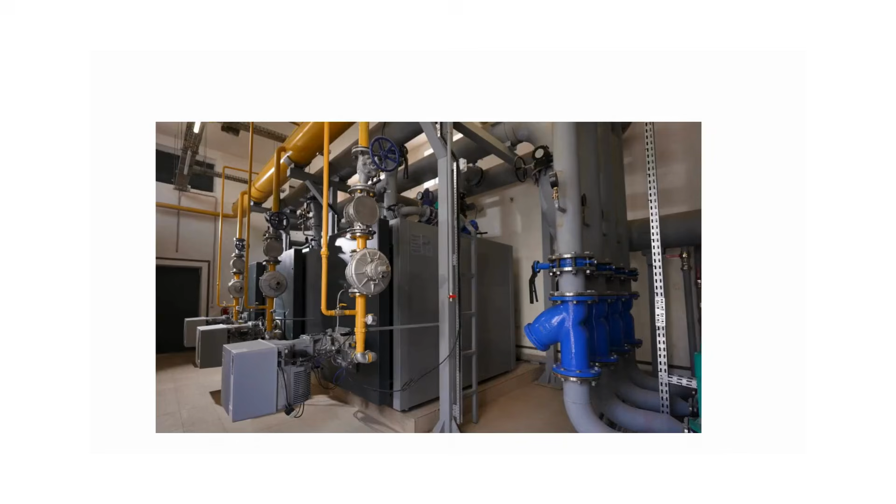A good boiler technician can walk into a boiler room and spot trouble before ever touching a tool. But how quickly can you do it? I'll bet you can find the problem in less than 5 seconds. Today I'm going to show you 3 boiler room photos. You'll have 5 seconds to spot the red flag in each one.

Some of these mistakes cause nuisance problems. Others can lead to poor heating, water hammer, and failed controls. So put on your detective hat and let's see how you do.

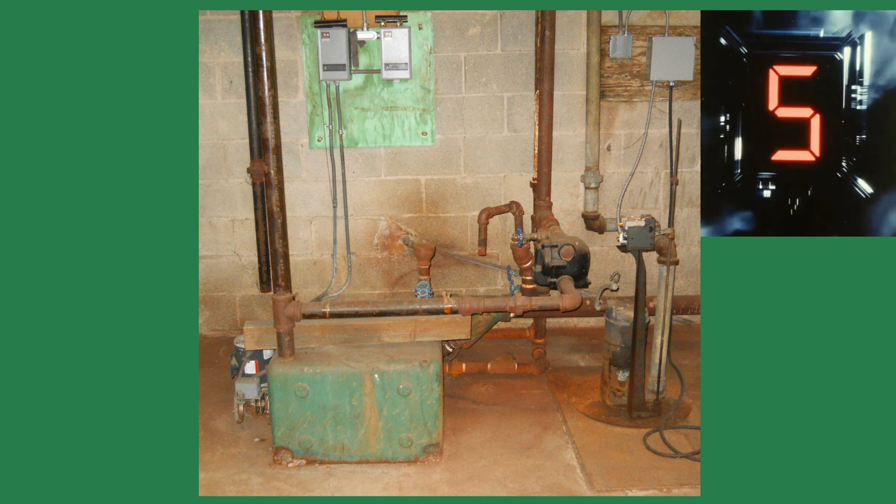Take a look at this picture. What red flag do you see? Did you spot it? There's a steam trap installed on the main condensate return line just before the tank. This is commonly called a master trap. Whenever I see one of these, I want to run as fast as I can from that building.

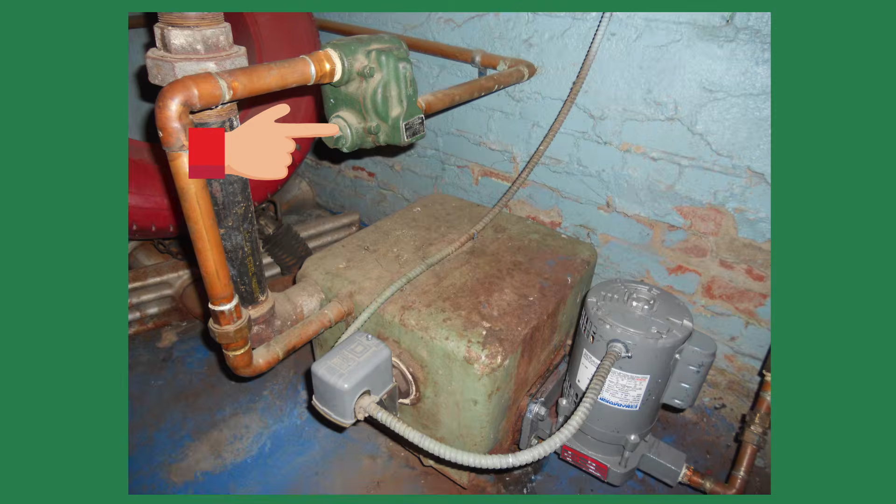Why? Because a master trap usually tells me there are other problems in the steam system, and those problems become your problems the minute you touch anything. The master trap is almost never the original problem. It was usually installed as a band-aid for another problem.

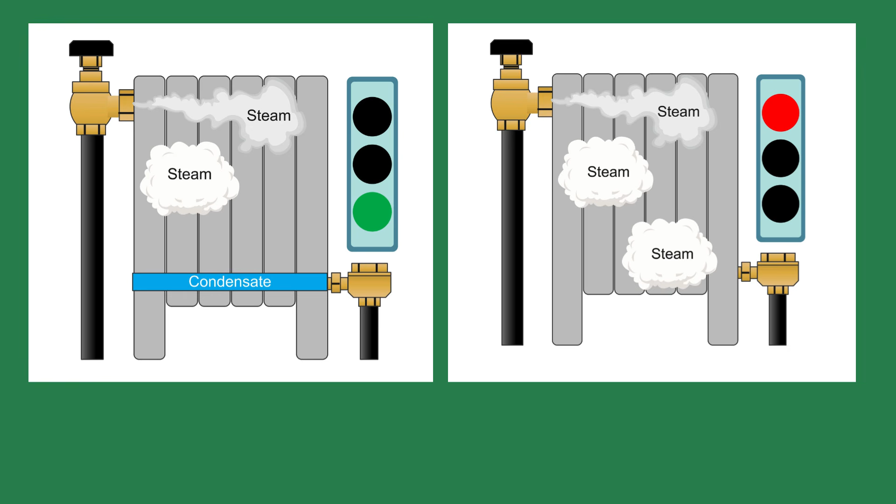In a 2-pipe steam system, the radiator and system traps are supposed to keep the steam out of the return piping while allowing air and condensate to pass. But steam traps eventually fail. If several traps fail open, steam can enter the return system and show up at the condensate receiver.

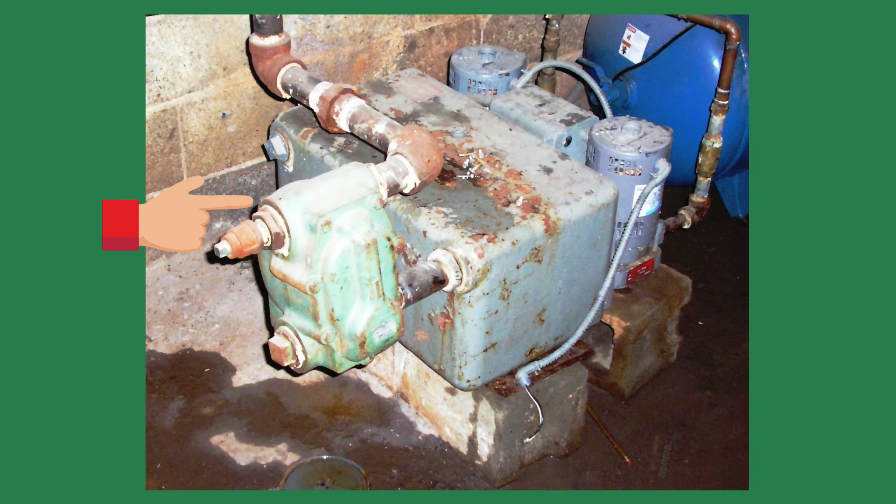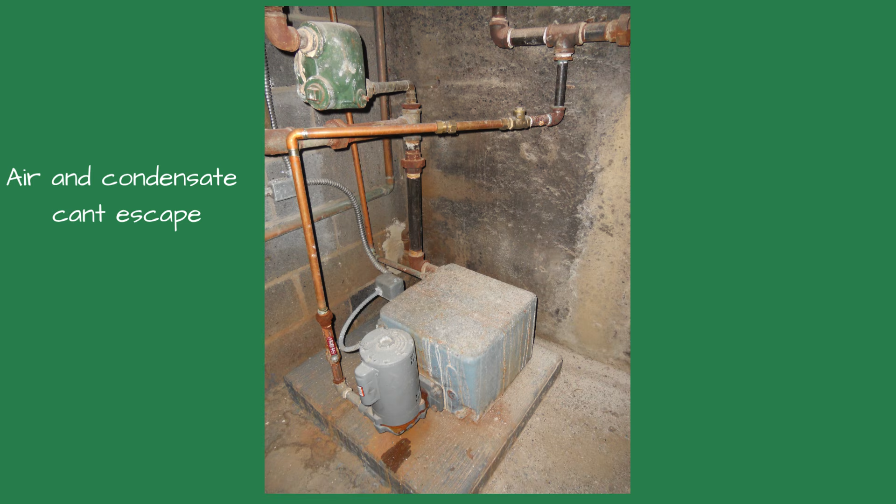Someone sees steam coming from the receiver and thinks, I know how to fix this. I'll install one big steam trap before the receiver. Problem solved, right? Nope. Now the system is double trapped. Air and condensate have trouble getting out of the system. You may even see slow or uneven heating, condensate backing up into the returns, water hammer, and higher fuel costs.

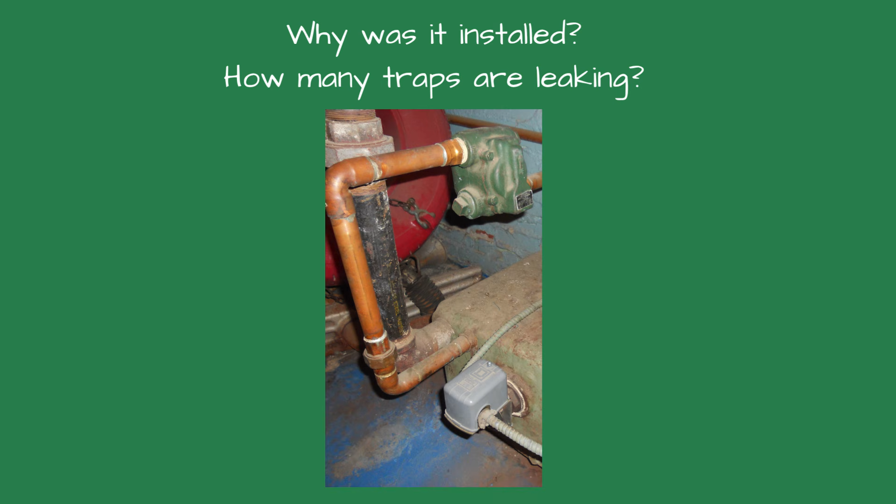The master trap hides the real problem instead of fixing it. When I see one, I ask 2 questions. Why was it installed? And how many traps are leaking into the returns?

I learned this lesson the hard way. I was working in an apartment building that had a master trap, and I removed it. What the owner neglected to tell me was that someone had removed all the radiator traps because they were leaking. When I removed the master trap, steam poured out of the receiver vent and overflow piping. That was a crazy day.

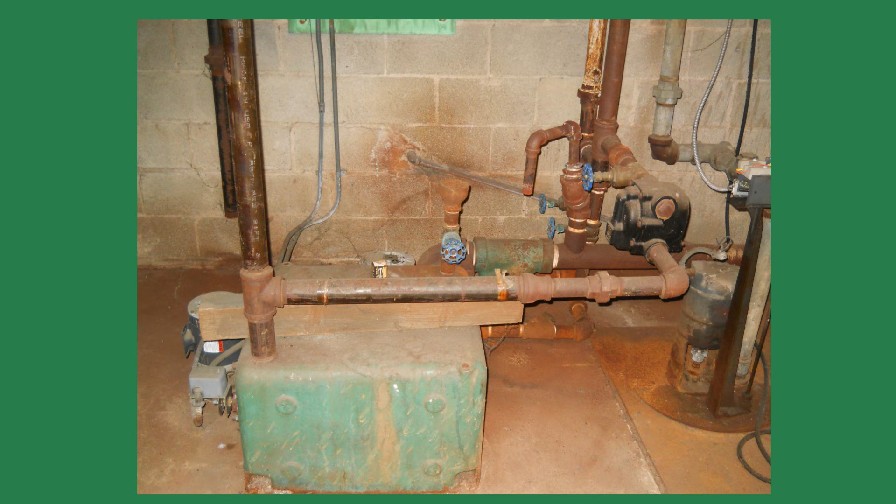The lesson? Don't just remove the master trap and walk away. Test the individual traps, repair the failed ones, and find out why the master trap was installed in the first place. Or just run away.

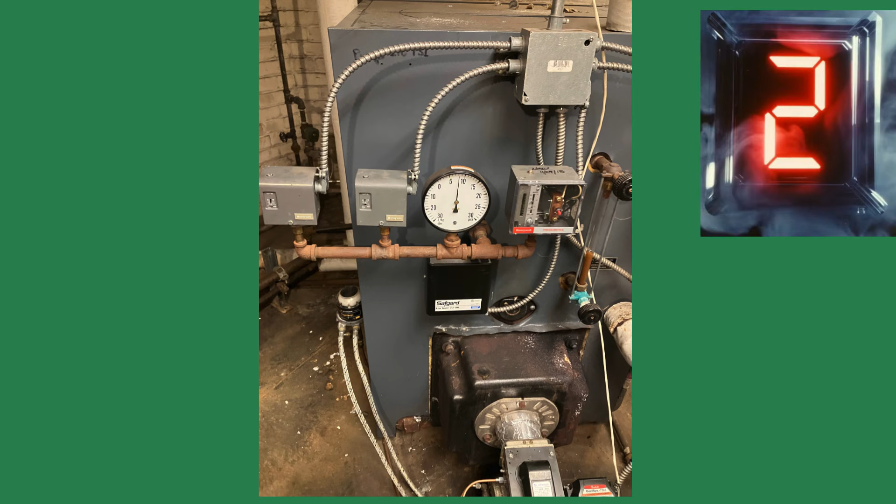Case number 2. Let's take a look at this boiler. This time the problem isn't what you see, it's what you don't see. Look closely at the pressure controls and the pressure gauge. Did you find it? There are no visible pigtails, siphons, or water seals to protect the pressure controls.

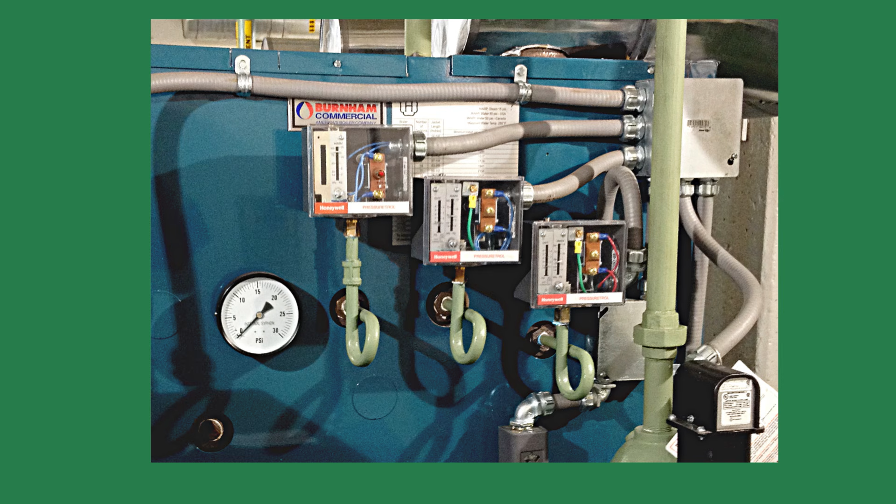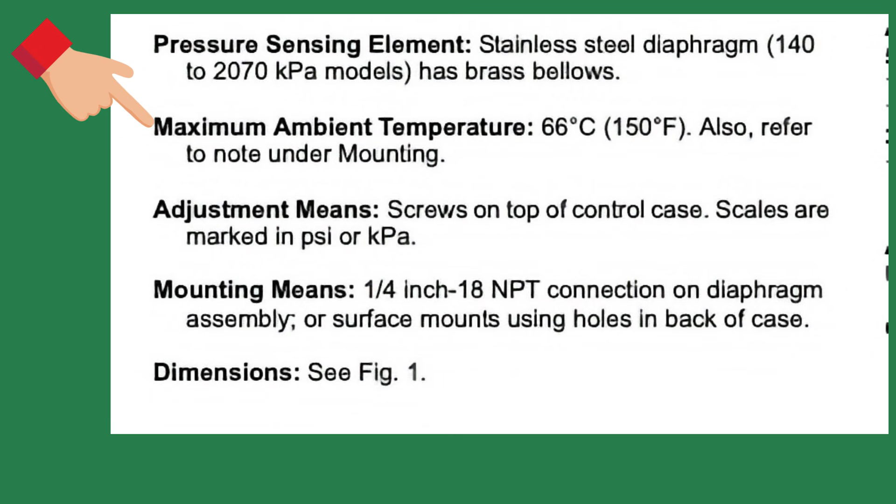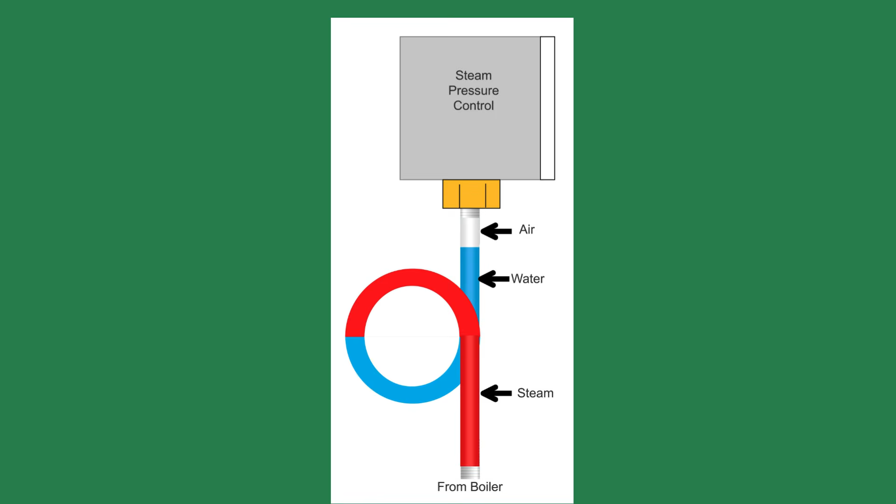Why does that matter? A pressure control on a steam boiler has an important job. It cycles or limits the burner based on boiler steam pressure. The control needs to sense the boiler pressure accurately, but it also needs protection from direct steam. Steam entering a properly designed pigtail or siphon condenses and creates a water and air seal between the boiler steam and the control.

Here's something else to remember. Just because you see a pigtail doesn't mean everything is okay. Pigtails can plug with sediment and often do. I've seen pressure controls that look perfectly installed, but when we removed the pigtail, the passage was completely blocked. The control couldn't actually sense the boiler pressure.

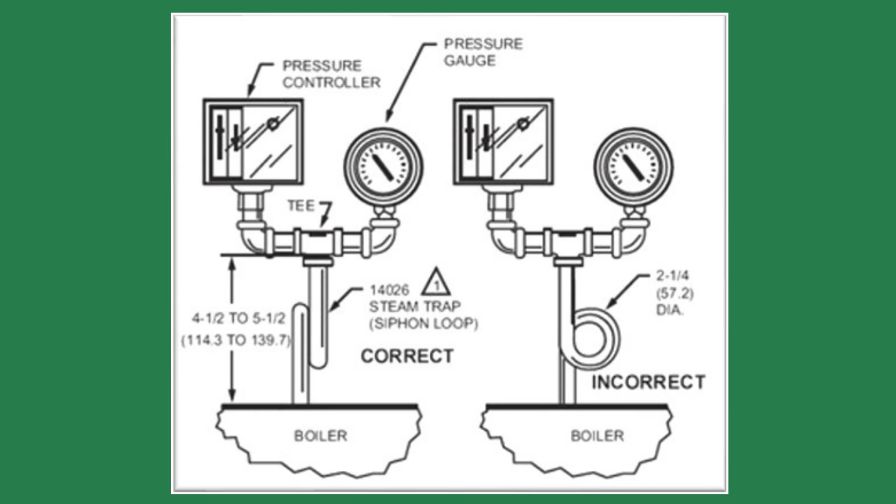On this boiler, I would check the manufacturer's installation requirements, install the siphons or water seals, and make sure every passage is clear. Test every operating and limit control. Never assume a control is working just because it's there. A safety control is only a safety control if it actually works.

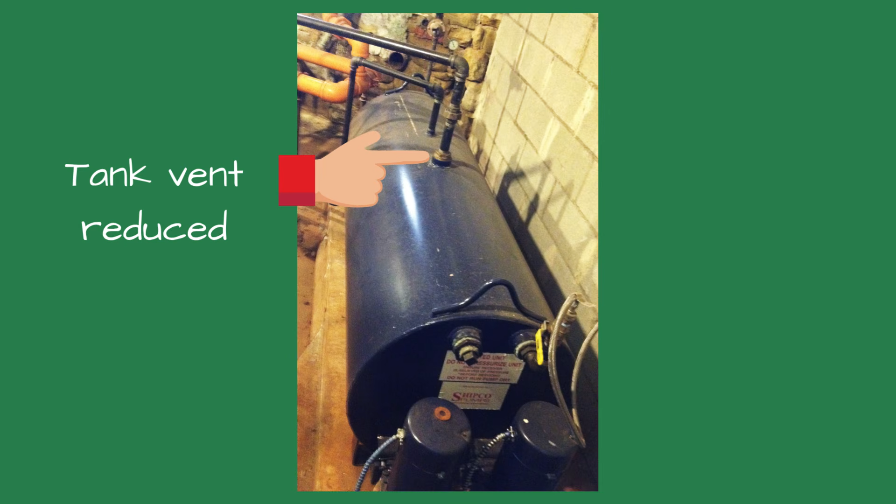Case number 3. Here's the last one. And this picture has 2 red flags. Can you spot them? The first thing I notice is that the receiver vent connection has been reduced. See the bushing on there? The second thing I noticed is a pipe plug on the tank overflow fitting.

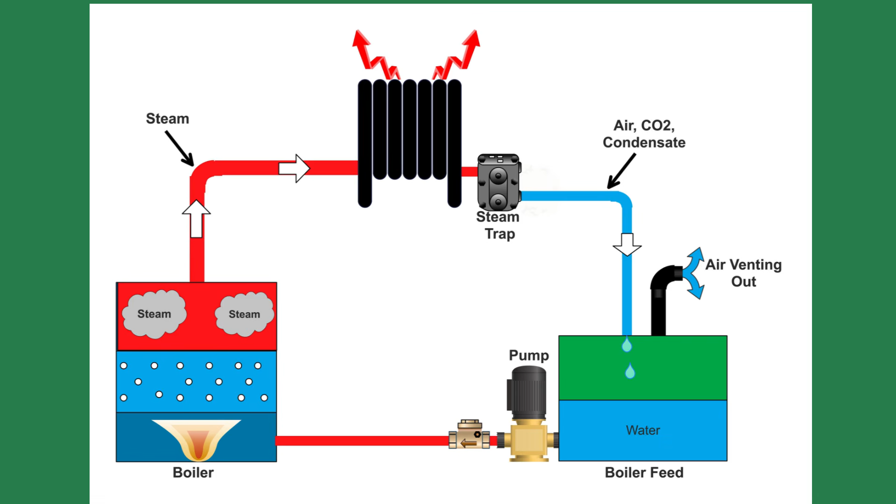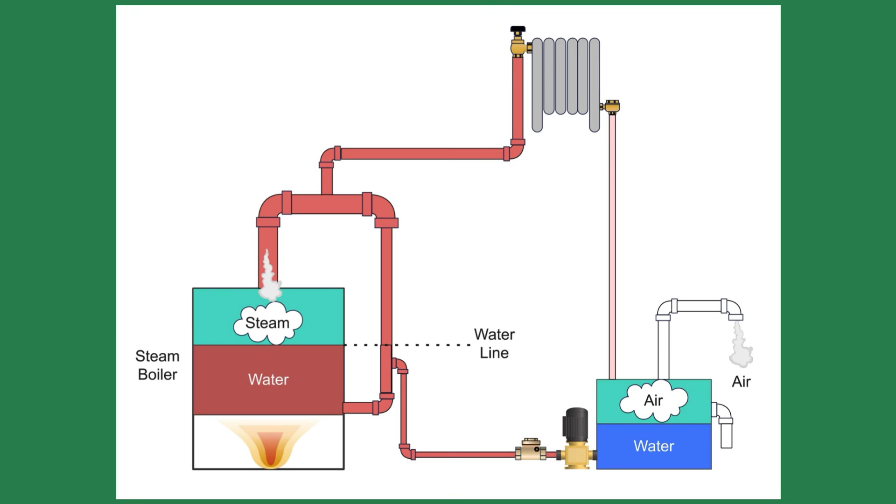A boiler feed tank is an atmospheric vessel. It needs to breathe. When hot condensate returns to the tank, some of the condensate may flash into steam. Air and vapor need a proper path out of the tank. Restricting or reducing the vent can create operating problems and interfere with the proper movement of air, vapor, and condensate.

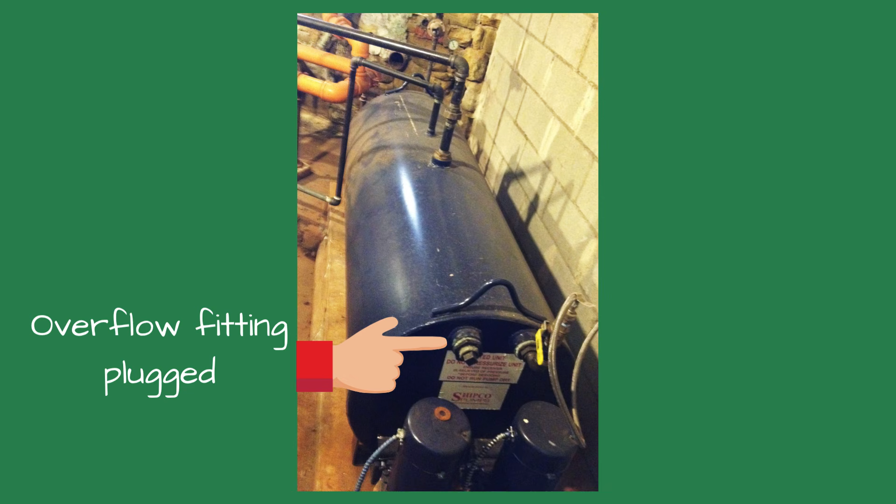Then there's the plugged overflow connection. I can't tell you from this picture why it was plugged, but I can tell you this. When I see piping that's been reduced, plugged, capped, or modified, I start asking questions. Who changed it? Why did they change it? What problems were they trying to solve? And did their solution create a new problem?

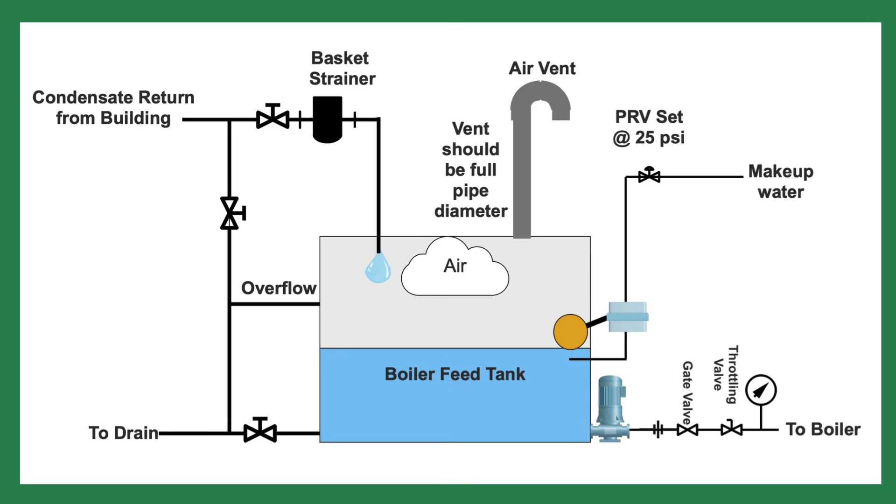Before changing anything, I would identify the tank manufacturer and model, check their piping requirements, and verify the vent and overflow arrangement. Find out why the piping was modified.

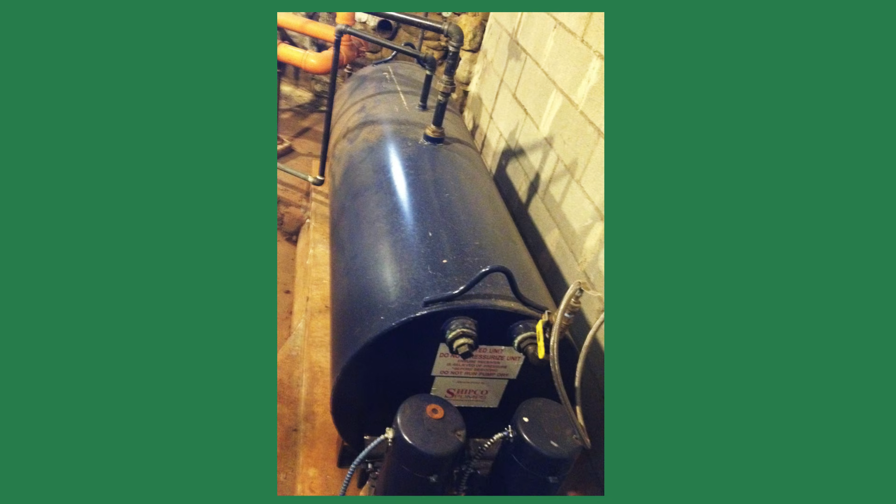The lesson from these pictures is simple. The master trap tells me someone was fighting steam in the returns. The missing pigtails tell me the person that installed it did not know steam systems. And the reduced vent and plugged overflow tell me someone modified the receiver piping, and I need to find out why.

A good technician doesn't just replace the failed part. They ask, why did it fail? What happened before I got here? And what is the piping trying to tell me? Because every boiler room has clues. You just need to know where to look. How did you do? Did you spot all 4 problems?